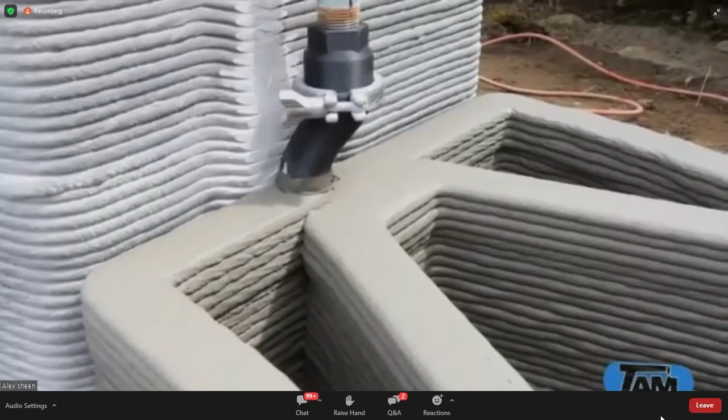This group of people, including, of course, Ian, has turned their attention to the 3D printed housing market, and they've got some incredible offerings through their work.

So for us to get into machines big enough for building houses is actually quite a stepping down in the grand scheme of things. And then, of course, the industrial automation around aerospace and wind energy is highly advanced, with very challenging different types of control systems and collaborative robotic environments. And so for us to jump into 3D printing was almost like a fresh space for us to work in, a new industry that hadn't really seen the state of the art applied yet. So that's how we got to this.

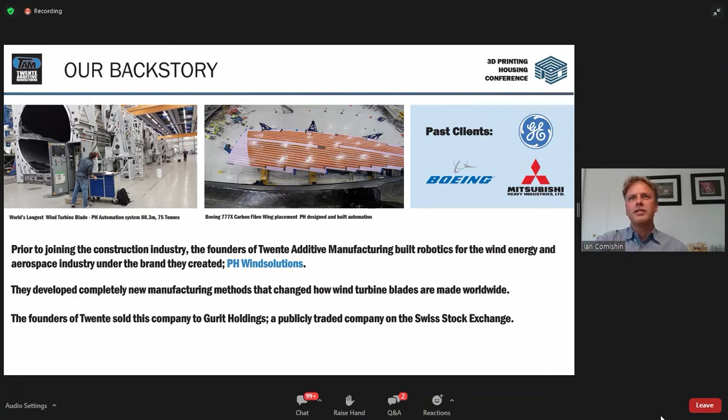When we went out there, there was pretty much an industry that had already been established. I'm sure all of you by now know the 6 main types of 3D printers that have been around for a little while. We can see strengths and weaknesses in all of these. It's a little bit unfortunate that some of my professional colleagues came on in this presentation and decided to use derogatory language around each other's technology, because everything that everyone's doing actually has its strengths. And of course, we could pick apart any piece of equipment. Not everything is perfect.

So the notion that the tide is going to rise all boats came from Chris's presentation from Mighty Buildings. I really like that concept. We really want to collaborate with everybody. We like the idea of this technology really changing the housing industry.

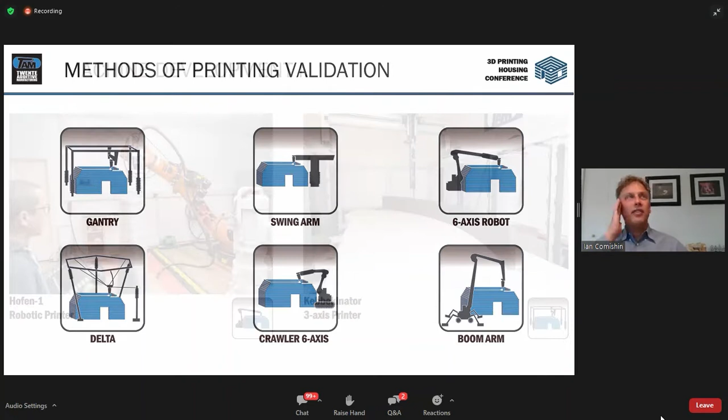An anecdote that I like is last month I was in Jakarta and I met with the Ministry of Infrastructure and Housing there, and they need something like 11 million homes for their affordable housing program that they're short. So if every one of the speakers in this conference today and yesterday was able to print 100 houses a year, which they're not, we're not at that scale yet. If each one of those companies was 100 times that size, so maybe 160,000 homes per year, it would still take us almost 70 years just to satisfy the needs of that one man in that one office in Jakarta.

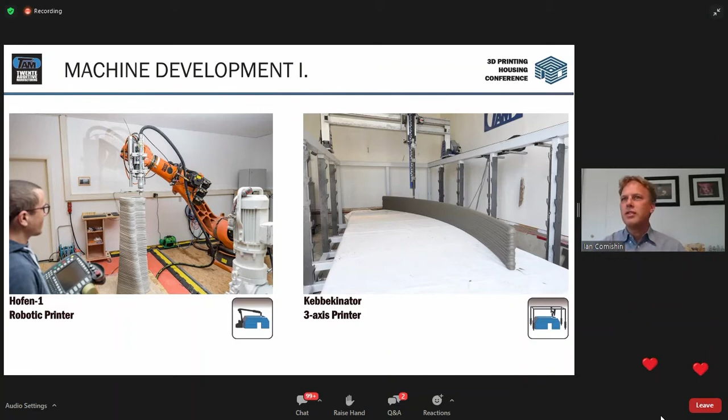So we don't really need to be trolling each other. We can definitely be building this industry up together, and all the technologies have their strengths and weaknesses. We wanted to look really at the best of all the worlds possible. So we built our first Cartesian printer, and we built our first robotic printer, as well as all the pumping systems that had to go with that.

And from there, we determined that if we really wanted to make a change, we would come up with a 9-axis Cartesian robot, a modular 3-axis on tracks, which some of the other companies out there are doing, such as Black Buffalo and Mudbots. They've adopted that same concept. And then we also want to do a mobile 7-axis robot.

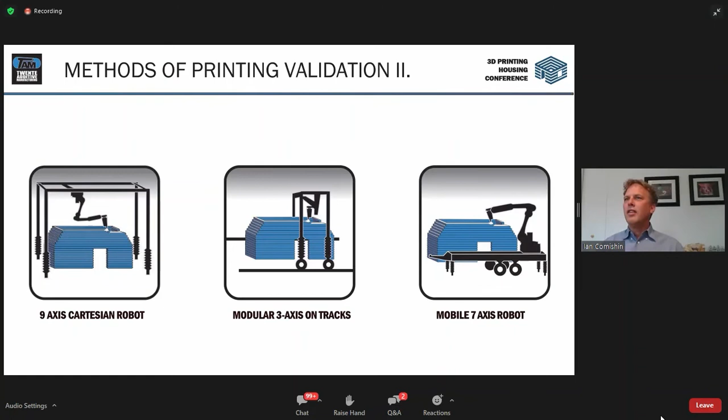Our first 9-axis printer, the Leonardo 1, we built this in Nelson, British Columbia. One of the things that's kind of fun about this space, and I know you guys were talking earlier about the world's first this or the world's biggest that. That's the kind of fun that we can still have in this space because everything is still so new.

I think it's really cool when one of our colleagues does the world's first something or other, because this early adoption stage we're at right now makes it so that there are hundreds, if not thousands of world's firsts about to happen. And it's the type of thing that gets the media excited about us and really puts this technology sort of at the tops of the headlines and in the feeds on people's phones. And that's really what we need to get people excited about it, so it actually turns into something mass accepted.

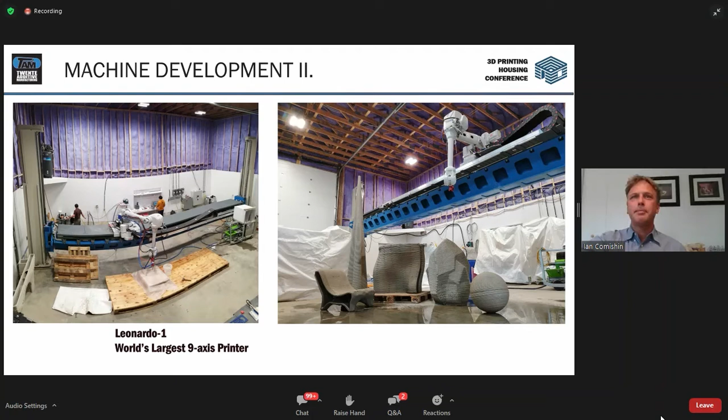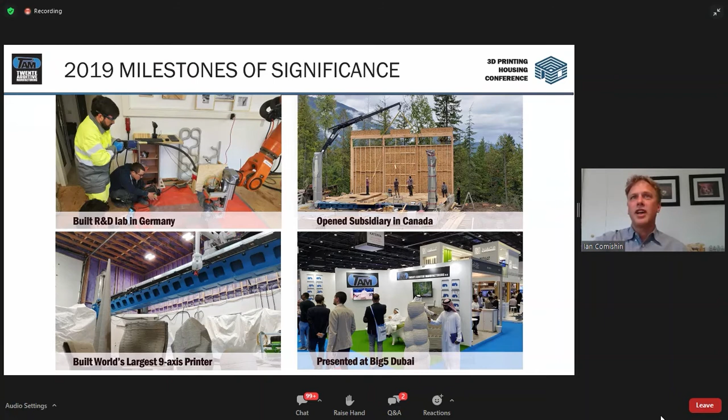We've got a couple of years behind us now. We've built an R&D lab in Germany. We built a subsidiary in Canada. Like I said, we built that first 9-axis printer. And then we printed live for the Big Five Dubai. In our second year of operation, we printed the first house in Canada. We built our first mobile printer.

Some conversation about what a mobile printer means. In our language, we like to refer to a mobile printer as something you can actually tow down the road. There are definitely some cool crawler systems out there that allow printers to move around on the job site, but that's the way we use the term mobile. We did a rapidly deployed building, and we printed the world's first 3D printed playground.

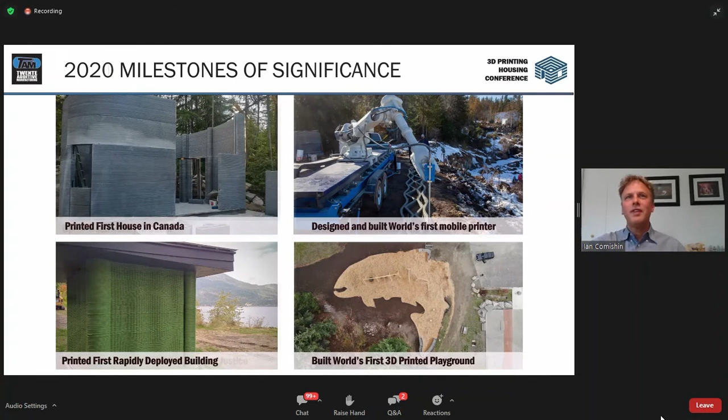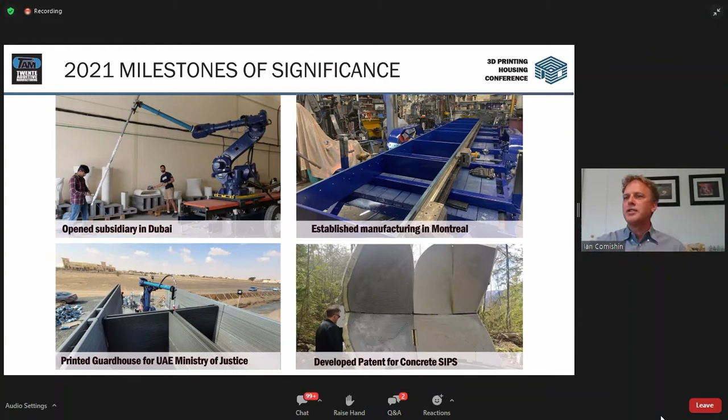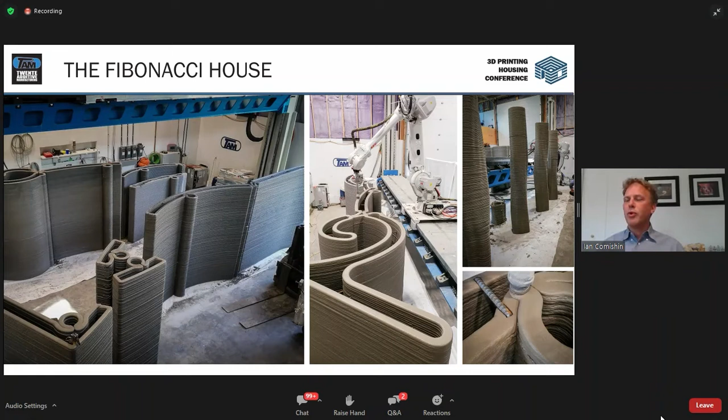I think the thing that's really got the most news attention for us has been the Fibonacci house. So what we chose to do is to try to make the most difficult house that we can imagine for ourselves in a short time frame and do it on an affordable housing budget. In this case, we used our Leonardo printer and we did everything prefab and transported the elements to site. We used a crane to lower them into position.

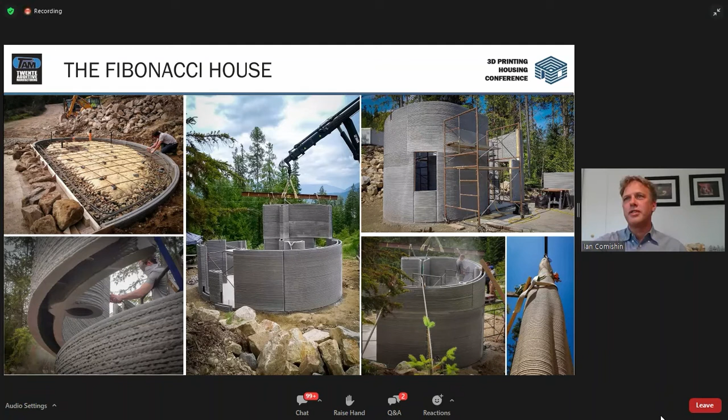And if you actually look, the footing, or it's actually a monolith slab, was also 3D printed. But those were also hand placed. We used a column system that used parametric design. And our technology was using both the 1K and 2K systems you've heard some of the other presenters talk about. Obviously, it's a tiny home. This was not meant to go on the open market. This was really just to prove capabilities.

I think the other thing that's quite important to remind everyone is we came from an automation background. We've not come from a construction background. We've almost had to become somewhat construction experts because it was so new that there weren't really any contractors in the region who knew how to go about dealing with this. And of course, we wanted to go through the learning experience of messing up as we're going along, and how is working with 3D printed elements going to be easier or more difficult.

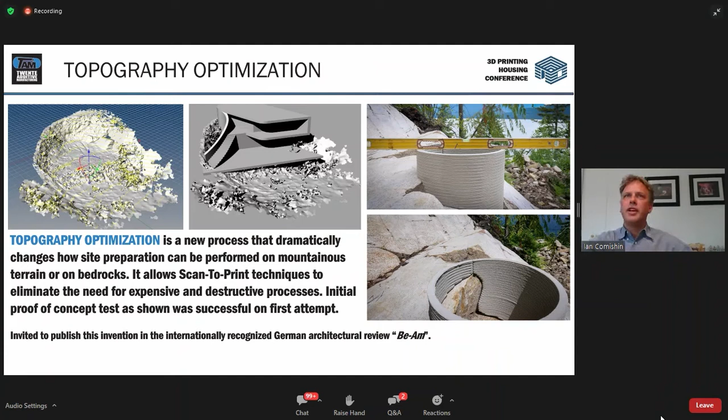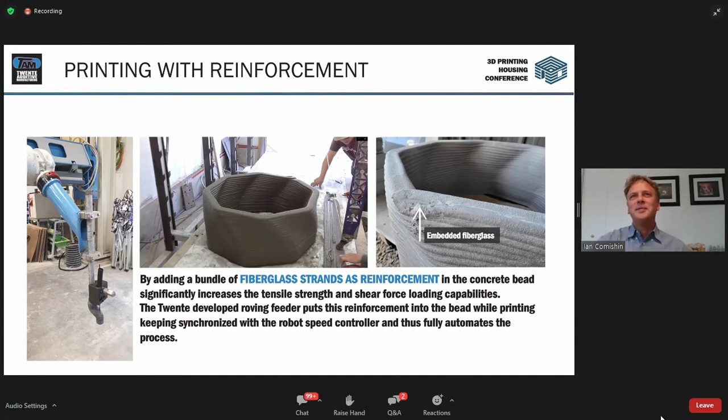And then we've also looked at this concept of building roofs. This is also an area that is a big question. People are constantly asking, how are you going to cover these buildings?

Traditional coverings are fine, but working with Alexander Curth, or Sandy Curth as some people call him, at MIT, we came up with this really cool concept of making squinch vaults with a 3D printer and experimenting with different nozzle orientations so that you could make these forms, potentially removing 40% of the mass of a slab. So skyscrapers could be on smaller piles, or they could perhaps be 40% taller for the same mass.

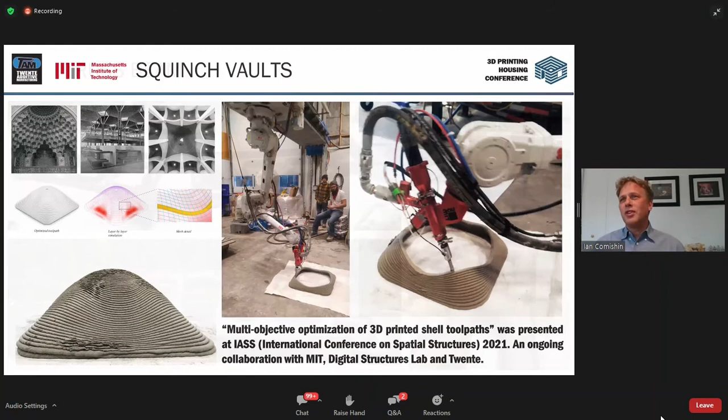We built a squinch vault concept. This is a very cool looking roof. It's got compound curves in it, but the thing that's really different about this strategy is we can actually 3D print the rafter locations in. So by putting this on the roof, you've reduced the risk of a construction worker who's going to be up there trying to measure out his 16-inch centers and having to use conventional measuring equipment. He can just drop the rafters into the slot.

This also actually was a combination of 3D printed material and then 3D printed infill because we wanted to put a rebar cage in afterwards. So the outside material is with the Laticrete material and the inside material is almost like a self-compacting Lafarge Ductal material. And then we also did actually use fiberglass reinforcement in the bead itself so that the different shrinkage rates between those two materials wouldn't fight with each other and cause huge cracking.

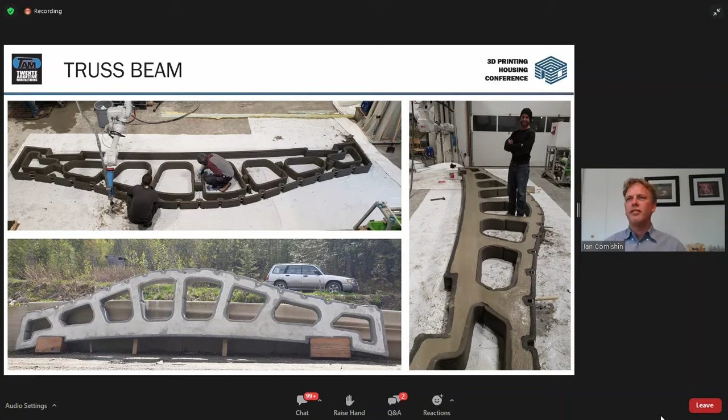You can use 3D printing for water management. So here is a ford that we made for a mountain bike bridge where there's an enormous amount of swampland. We're working with Saxion University to build fish ladders to create spawning habitat.

What's interesting about this is that they didn't actually use any geometry in the mathematical sense to determine what the heights and the sizes of these fish ladders would be, but rather they created an algorithm that took into consideration the flow rate of the water, the species of the fish, the sort of known heights that they like to jump in their natural environment. And then the part was created for the robot parametrically. So it's a way where the technology can actually go far beyond what conventional concrete construction is, even at the design level.

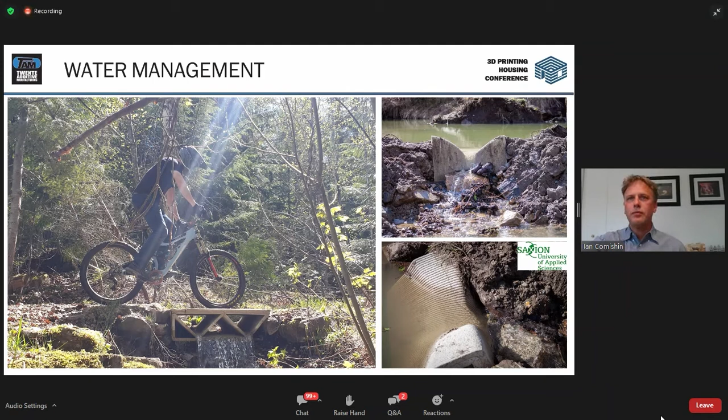We work closely with other universities. I mentioned Saxion and MIT, of course. Selkirk College, we're doing a topography optimization project. There's a really nice group of people called Citizen Robotics in Detroit who really jumped into this early. It's an offshoot of the Lawrence Technological University. They have garnered the attention of quite a few people in that region for affordable housing. University of British Columbia, we're working with them to develop a pump.

So there's a very great relationship that we build with universities for a couple of reasons. One, they're really the ones pushing the acceptance of this, both at the code level, but also at the level of how the community accepts this technology. The stuff that KEIKO presented in his presentation, if you want to attend the Loughborough RILEM event, you'll have 3 days of that scientific work. It's really phenomenal, and we think that the only way we can succeed is to keep maintaining these relationships with universities to keep that knowledge. And of course, to get great resumes, right?

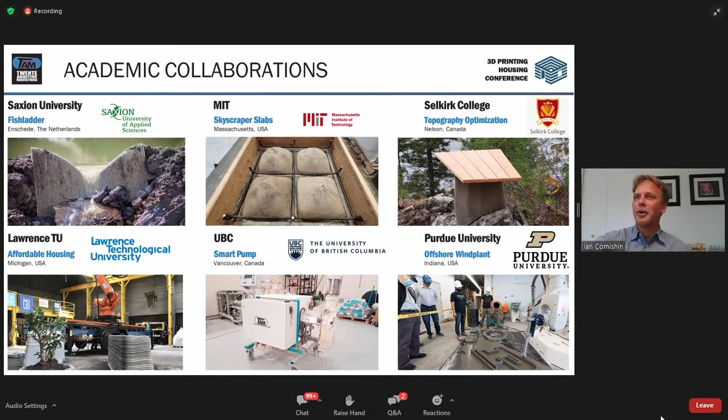So the reason I was invited to talk today was to focus on a printer. I could keep going on about all sorts of things we've printed, but we actually have 6 printers in our product line. So I'm just going to focus on the one that we call the TILIKUM, because it's the most unique in comparison to the other printers that have been presented here. So this is what we developed for doing on-site but mobile printing from the perspective of being able to get in and get out with quick setup.

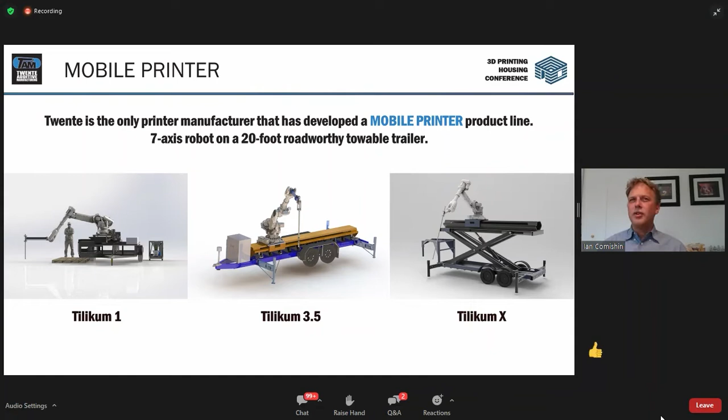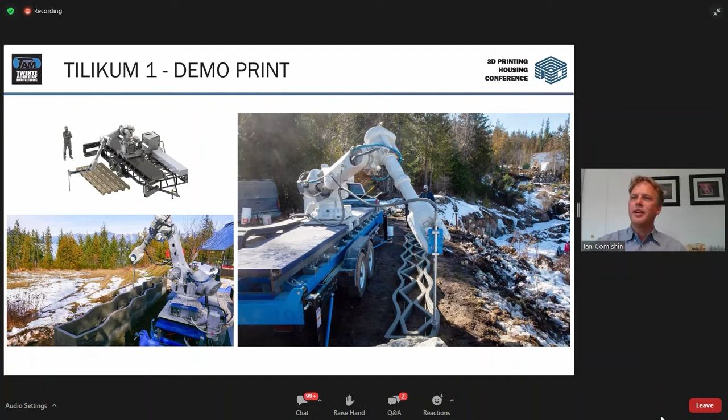So it sort of couples a bit of a large print area. So the track itself is 20 feet long. The robot has about a 12-foot reach, but then we can also add up to 7 or 8 feet of nozzle on that. So it's pretty easy for us to do 550, 600 square feet of printing area. The first one we built was the TILIKUM 1, and we gave it a stress test on its very first day of printing. We took it outside where there was frozen ground and pretty harsh work environment, and it works like a charm. As I'd mentioned, Citizen Robotics, they were under the fire to get some really cool prints done for the governor of Michigan, who was coming to visit them. So this is an example of the TILIKUM being used there.

The Ministry of Justice in Dubai. This is a really weird project because the building had actually been started before we got there, and it was designed to be built using cinder blocks. And what had happened is they'd already had plumbing and rebar coming out of the ground. And so we had to actually figure out a tool path that would take into consideration the obstructions. And so we had to move around the different blocks in a way that would allow for us to not have the printer hook up and cause a misprint.

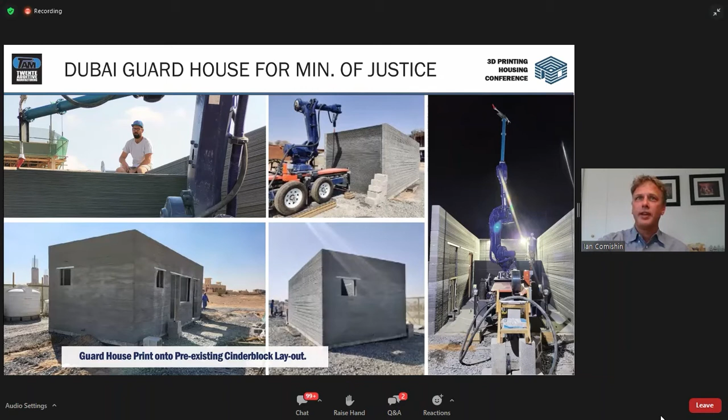We used that same printer about a week earlier in a live presentation in a trade show where we put the 2K nozzle on, and actually everything you see there was printed in an environment where we had hundreds, sometimes thousands of people passing by the booth, watching us as we printed live.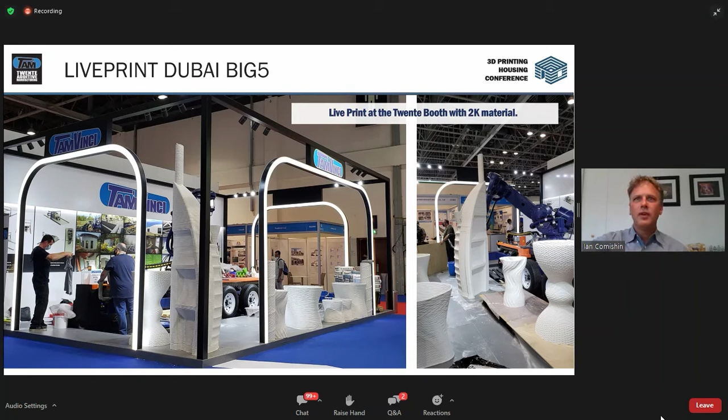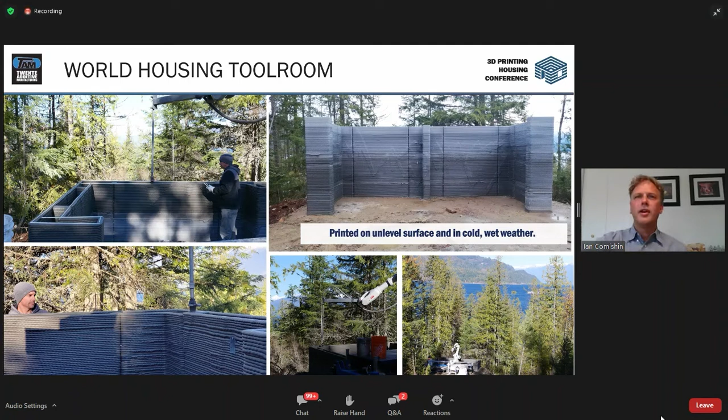The thing that's really interesting about the TILIKUM is that it is fast setup. It is quite a large print volume. So that print you're looking at there, it's for an affordable housing project. It's just a tool room, but it is in a very rough environment. And that was done in one setup. So you can see that there's a fair amount of print space that you can accomplish with a 7-axis machine.

You can use it for doing really cool slab prints. In this case, this is an artist from the Tahltan community in Canada who drew this Thunderbird. And we use the print to use dams. Basically, it's a damming system where we can put different colored concretes, conventional concretes in between to make a really nice aesthetic look.

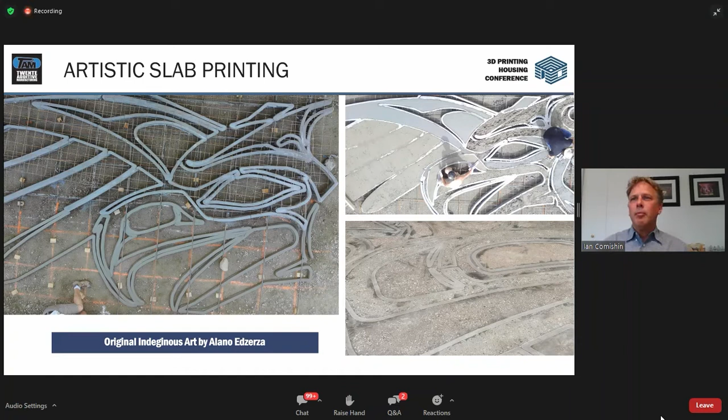But you know, the real point of this conversation is, can this technology be used for housing? Of course, we have our other printers that are much bigger. They're obviously much more set up for large prints and doing housing. But the notion of rapidly deployed and being able to get in and get out quickly makes the TILIKUM a really interesting machine for designing houses specifically for rapid deployment.

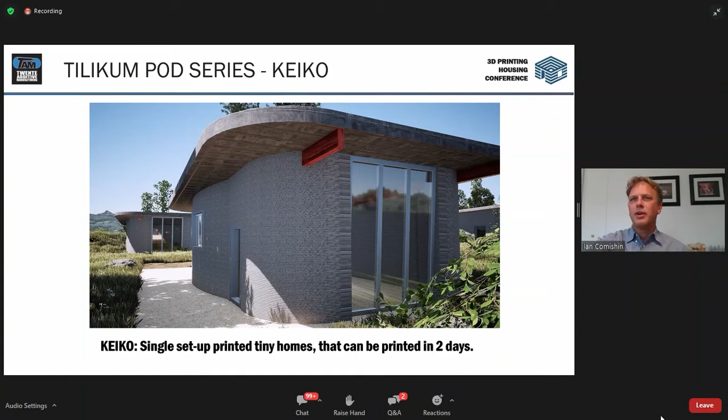And in this case, the printer itself will actually only be set up one time. And this entire 550 square foot home will be printed. We figure it should be done in about 24 hours, but you know, we're saying two days just so we don't overpromise. They're structurally resilient buildings.

They've got 2 walls. In order for them to be approved in some jurisdictions, we are putting in a post and beam strategy. Really doesn't take an enormous amount of manpower or person power, pardon me. 2 operators can run this, and most of the time they're sitting there looking at their phones and talking to their buddies and checking to make sure that the pump is being properly fed.

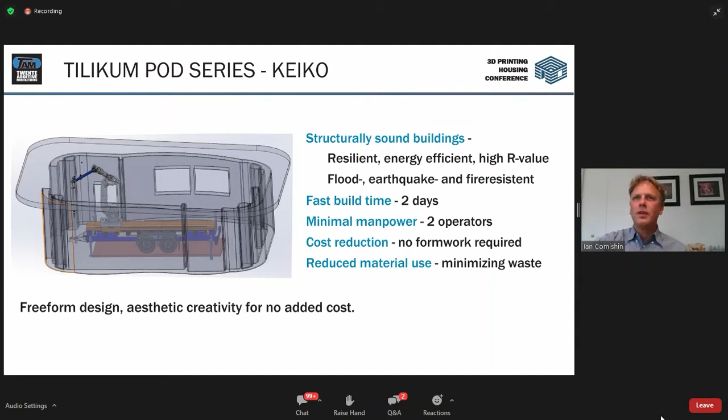So I think from this image here, you can see kind of how it's set up. The concept is to have a window wall or a curtain wall on one side so that the printer can be pulled out. It's a little bit wider than an average door. So from that perspective, you have to have some other type of frame that goes in there. In this case, we chose glass. But it's not impossible to pull the printer out and print that final wall in if you wanted to. In this case, we're just trying to do a single setup concept.

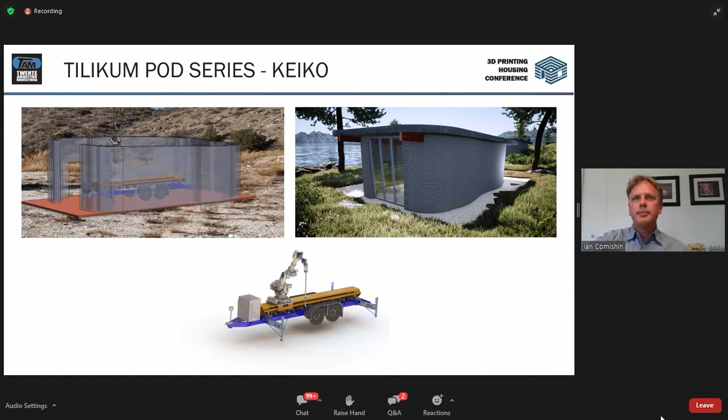The roofing system can be whatever. In this project that we'll be doing coming up, we're going to be using cross-laminated timber. You can use rafters, you can use conventional trusses, or if you're feeling experimental, we can do the MIT style slabs or other 3D printed versions.

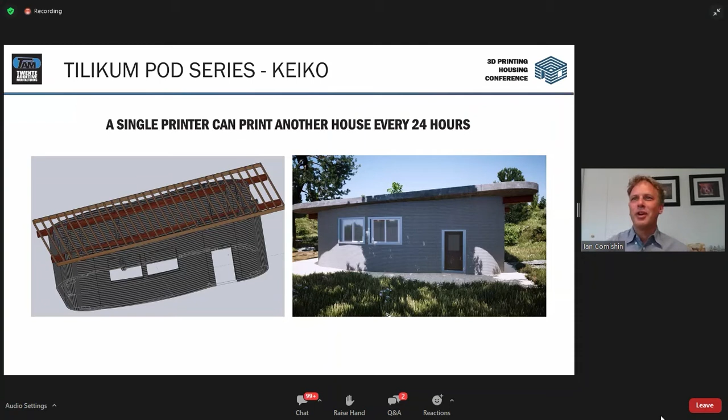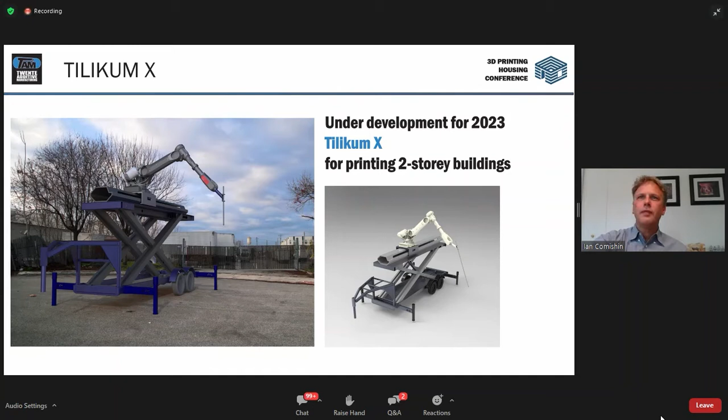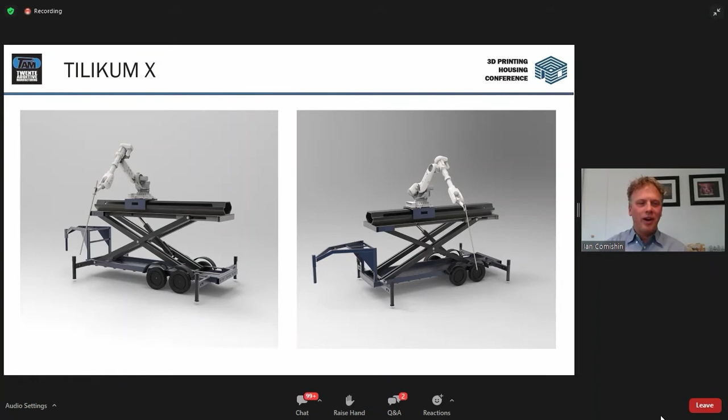Yeah, so I guess that kind of wraps up the conversation around the TILIKUM X. The idea of this presentation, the way it was asked by Alex and Kevin, was to sort of focus on one of our printers. But to be honest, our modus operandi at Twente has really been to push as much as we can technology into areas where people haven't imagined yet. You look outside any city, any urban area, and you'll see that virtually everything has some sort of concrete component to it. And 3D printing can play a role in any of that.

And that's why we have so many different types of machines, because the application case for one customer will be completely different than the application case for another customer. So, and everybody who spoke here, they're selling machines faster than they can make them. There's lots and lots of room for people to join the industry. And we love the arms race that we see going on right now. So it's really in this industry.

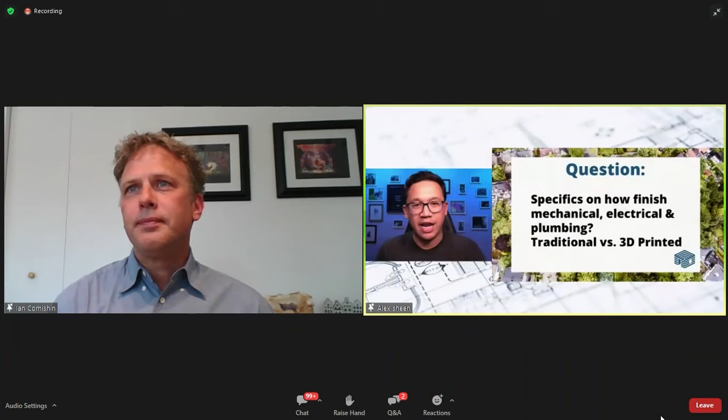These are areas where the machine can be taught to deal with this stuff, and that's where the cost savings are really going to start happening in an affordable housing project. The notion that it needs to be more expensive because it's complex is going away, as you say. And any additional thoughts on how to finish MEP that you've seen in the field?

Obviously, you came from a technology background, but you're interfacing with folks who are building these houses, and things they've brought up that are kind of behind the scenes. Any thoughts there? Of course. Yeah, well, look, I'll be honest with you.

We're hoping that 3D printing is the gateway drug for the automation of the entire construction industry. We see robotic placement of plumbing coming, robotic placement of electrical coming. This is not a far reach in this space. As you saw, X3 was putting windows in their prints. This is going to be very easy.

We have milling capabilities already on our printer. So we're doing a project with a company in Japan that has a bunch of compound curves with foam between those curves. We were able to just take the printer head off, put the milling head on, and carve out the elements that need to be carved out. Then we just went back and printed the next layer down. So that side of what needs to be accomplished is actually not really a far reach.

One of the things that John said yesterday that I kind of like is that we're giving each other too many high fives. There have been so many amazing automation processes accomplished in so many other industries. The construction industry is really coming on very late in this space. All you have to do is download a couple episodes of How It's Made, anything related to agriculture or food management, and you'll see that the machines we're making for 3D printing are kind of basic. We're giving ourselves pats on the back like we've invented this crazy technology, but it's kind of child's play in a way.

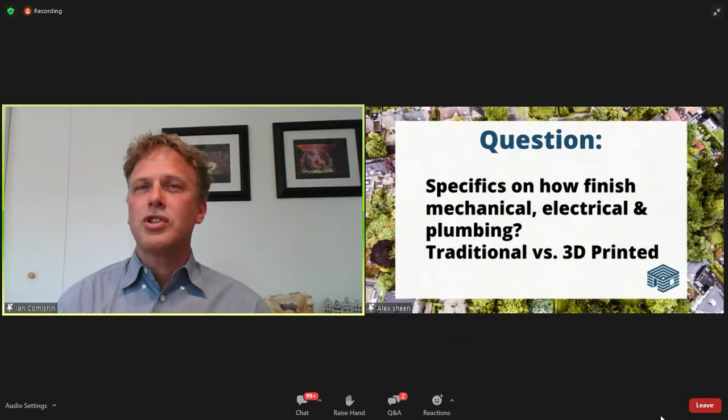Yeah, it reminds me of my days working in an enterprise software company in market research and competitive intelligence. It was an earlier part of my career, but the thought was, we kind of had a miracle technology, and it wasn't that complicated, but it really solved a problem. As I was being introduced to the culture in different industries, banks and healthcare adopt technology right away. But certain higher education, back office stuff, and even government can sometimes be slow, at least in the United States. It's literally a culture of adoption, not just, I got the miracle, I got what you need, and I'm telling you it will pay for itself.

But you're absolutely right, how fast is the construction market going to adopt to this, or is it even possible? Even like a Tesla, everybody says Tesla, but it's a good analogy, right? An X factor comes out of left field and says, if you're not going to adopt and change fast enough, I'll just move into this space and do it myself. I wonder what our path is in convincing the construction industry traditionally, or does this become a new space? It'll be interesting to see how that plays out.

There's an anecdote I like to give that describes the state of the industry we're in right now. We receive an enormous number of phone calls or emails, and people ask, if I buy one of your machines, how much is it going to cost for me to build a house? It's a very strange question to ask us as machine builders, because there's an infinite number of variables that go into building a house. It's a very complex piece of machinery, and the technology we're providing really is just to deal with one of the elements, the structural integrity of the building, and maybe the finish, should that be the goal you're going for.

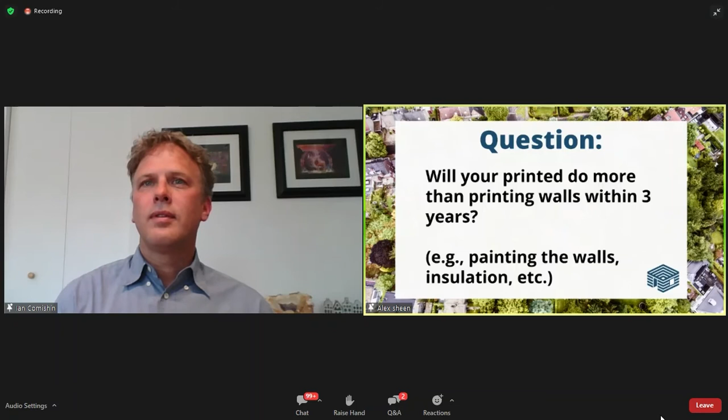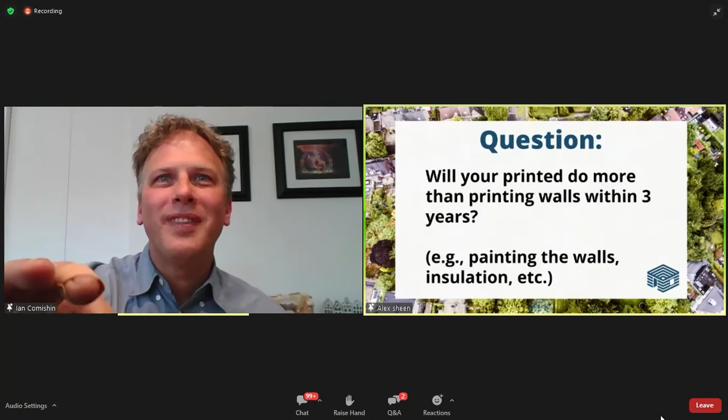And then we've got a question about any hydroelectric projects, and I'll expand this to things that aren't printed walls. Any new things in the pipeline outside what you've already done, or ideas about what you can print beyond walls? Let me do a quick screen share here, if that's okay - slides we didn't get through, but let's see if I can pull this up.

We are actually working on a water desalination project in Indonesia. You can see on the left, it deals with some very tall columns. They're going to have steel I-beams already in the ground because of the nature of the project - they need the roof standing before we can start printing. So we'll have to work around that by moving the nozzle around.

This project is for the US Air Force in Dubai - we're printing them barricades. It's a funny project because they have rebar sticking out of the ground 6.5 feet tall, so we built a nozzle that can actually reach around that rebar, all the way down to the ground.

This TILIKUM single setup house called the KEIKO - we're going to be printing 20 of those houses this spring, hopefully starting next month. It's for a town that was absolutely devastated by floods, there was a big rainstorm last year, and they want to rebuild something slightly more robust. It's just temporary housing while families get back to their original homes. So I think I answered more questions than were asked there, but that's all right. Using this technology for things other than housing is absolutely going on.

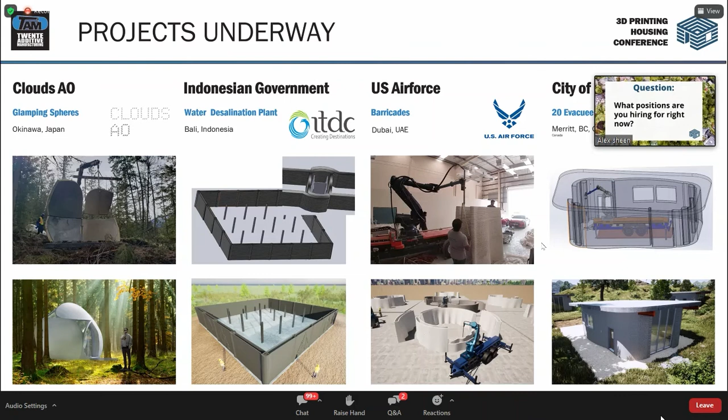Just a question I think a lot of people are focused on as we're growing our organizations - are you hiring for any positions, internships, partnerships? What kind of connections are you looking for? Yeah, we're always taking resumes. We set out to be just a machine builder, but we're definitely in the printing business as well. Part of the reason is it's a massive investment for somebody to jump into this space.

We have clients who are taking the risk and they're going to be printing, and we will send teams out. So if you like traveling and you want to see the world, we're definitely putting people on airplanes to go and work with our clients all over the place.

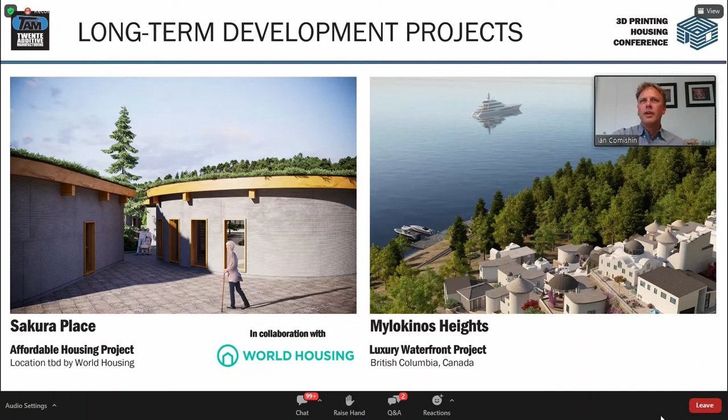Nice. And I got a question about something that Twente Additive Manufacturing posted on LinkedIn. There's a question about a post that mentioned that you tested different print strategies. Is there any report or publicly available result of that? Yeah, so the most recent testing that we did that I think should be coming out publicly would be with the University of Windsor. They are actually collaborating with a bunch of different printer manufacturers as well. So we did all of the empirical testing for the houses they're going to be building.

They're actually going to be working with a company called Nidus, which has a Cobod machine, and they should hopefully be giving tensile properties, compressive properties, the water penetration and water permeation properties. But honestly, the Canadian universities are pretty far behind what's come out publication-wise from Europe already. Definitely TU Eindhoven, they're giants in the space.

The team of students and the PhDs that have come out of Theo's and Freek's group there are really good. And then we're all in awe of everything that they've done at ETH Zurich as well. Those guys have some phenomenal graduates who've done excellent publications and lots of publicly available reviews on the science behind this technology. Awesome.

Can you talk about printing unsupported overhang with a 2K system, or any thoughts on that? Yeah. So a lot of the videos that we published that have become very popular are the ones using the 2K system, which everybody knows is a little bit more expensive than conventional 1K, but the build properties are phenomenal. It's really fun to work with that stuff. We have an awesome partnership with a company called Baumit. They've got some patented technology that works really well and a nice material.